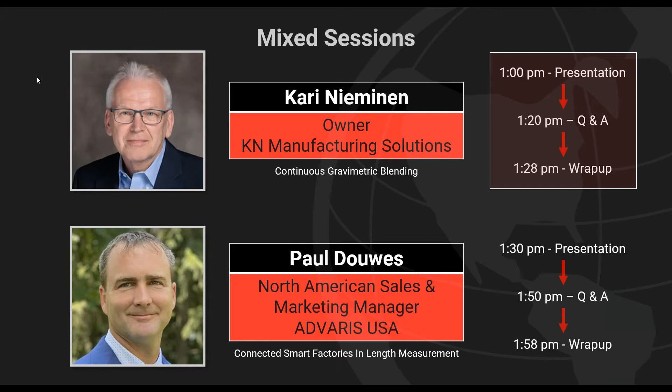Kari: My presentation combines two topics, though it's actually simpler than what we heard. First, we'll discuss continuous gravimetric blending and its benefits compared to other, better-known systems in wire and cable. Second, we'll discuss integration of these systems into lines—not so much how to integrate, but why it makes sense to do so.

A little more background: KN Manufacturing Solutions, my company, serves the US wire and cable market as a distributor for a Dutch company named Movacolor that makes these blending systems. They're pretty well known in the plastics industry, but in wire and cable we still have plenty of work to do. I also do a lot of control work and represent other companies as well, so that's the quick reason for the topic.

Before going further, let's look at the other systems I'll compare to. We have different kinds of blending systems. There's the volumetric blender, where mixing is measured using volumetric measurements or volumetric flow rate, and the same concept applies to gravimetric, except there we use mass measurements or mass flow measurements.

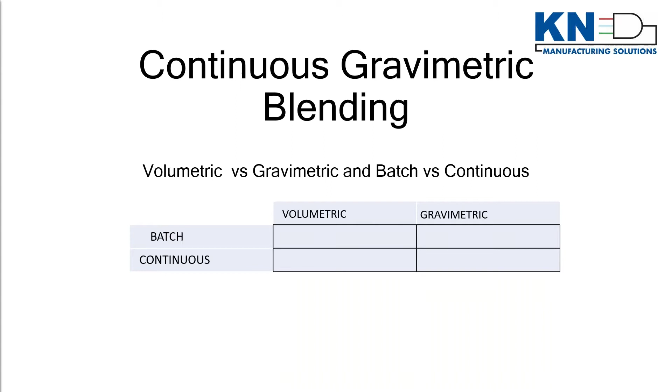From this we get four different systems: volumetric batch blenders, gravimetric batch blenders, continuous volumetric, and continuous gravimetric. The last one is really the topic I wanted to talk about. The other three are quite well known in wire and cable in the US, but the last one definitely is not—that's the reason for this topic.

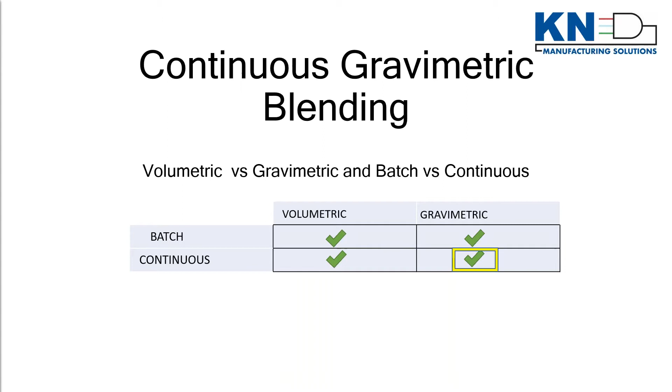On the next few slides, I'll compare two of those systems side by side at a time. I'll start with two batch blenders, showing generally how they work and the main benefits compared to each other—sorry that these sketches aren't great. On the left is a volumetric batch blender, and here we have a gravimetric batch blender shown as a graph. I have a nice picture of this one, but it's just a schematic.

They both have things in common: they sit on the extruders, feeding directly into them, and they have their own local control systems. They also have hoppers for main materials and additives.

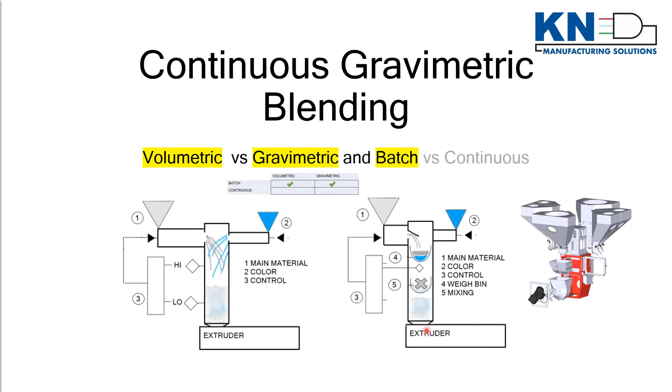That's so special. Okay, just... something's not quite right with the alignment.

Anyway, just a quick comparison. On a batch blender, I guess we can say it's better suited for more accurate handling of material variations because they have a load cell. However, they also have mixing, which sometimes under certain conditions with certain materials can actually make the accuracy worse. So instead of helping, if the mixing isn't good, it can spoil it.

However, on volumetric batch blenders, we can see that they are more user friendly, easier, they need less cleaning, and therefore they're faster for color changes and that kind of thing. However, they will produce some overage waste unless you make a special arrangement.

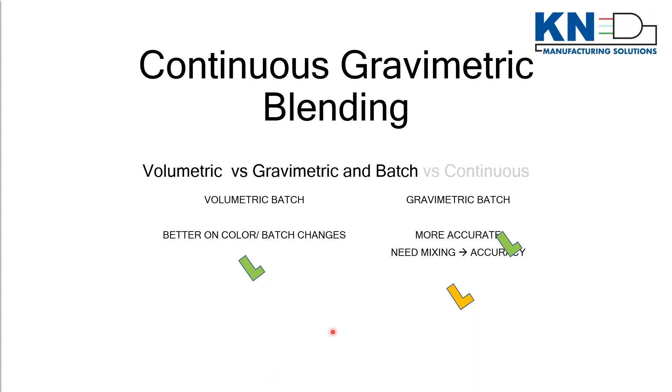Now here we have two continuous systems. On the left, we have continuous volumetry. On the right, we have continuous gravimetry. As you can see, there's not much difference, and that's really the case. Hardware-wise, they look very similar.

Again, they have material coming from the top, feeding through the neck piece to the extruder, and then all the additives come in. There can be a number of additives for different materials, and they come in from the side. Actually, I have a better picture of it. Again, the main material comes through, and the additives are fed in from the side.

Here on the picture, we have a dosing cylinder. Sometimes they're screw feeders, but dosing cylinders provide better output. You can get lower rates with these two units.

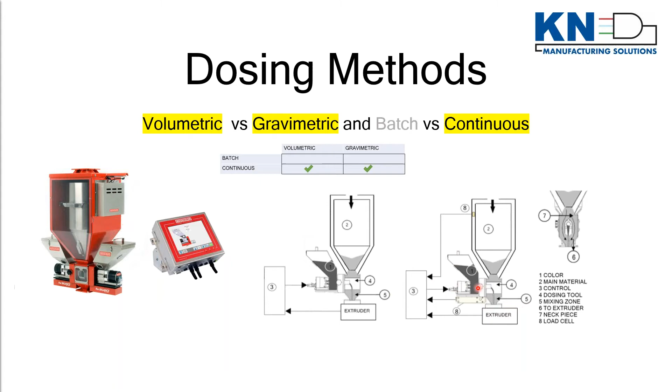But if you look very carefully, you can see the difference. The gravimetric system, of course, must have load cells, and we have a load cell for the main material, and each unit here has its own load cell to measure the loss in weight, from which we can calculate the total output of the extruder and control the dosing unit to maintain the right mixture.

If we compare these two, the only real difference we could see was the measurement. One is gravimetric, with continuous measurement for the material mixture, so it's a much more accurate system than volumetry. Normally the cost difference for this kind of system is quite minimal compared to the benefits we can have.

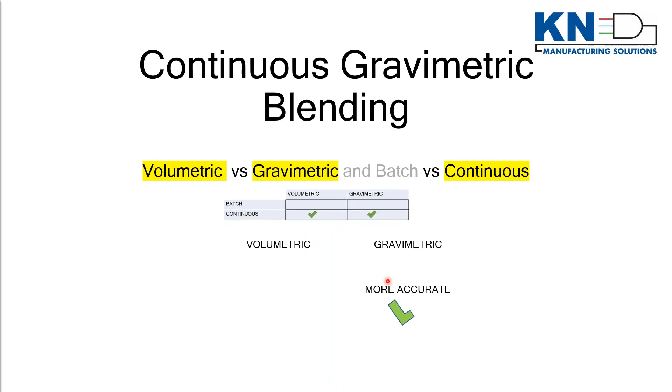One more, last one. Let's look again at the two gravimetric systems. This is the same as what we had a couple of slides ago, and one we had on the last slide.

Just to repeat, on the gravimetric batch system, we measure one material at a time, and for any errors in the measurement or control, normally the correction is done on the follow-up cycles. In the continuous system, all the materials are measured all the time, continuously, and any error is corrected as soon as it's detected.

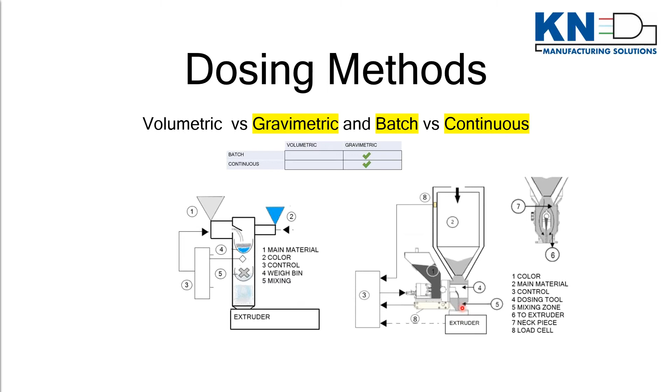On a batch blender, we have to have a mixer, the material has to be mixed. There is no mixer here, no need for one. Material is fed directly through right here, so it's always homogeneous. That's never an issue.

And finally, the design itself. In the continuous system, we don't have this kind of thing because there's no mix or blend stored anywhere. So we can do very quick batch changes. When the batch finishes, we don't have any overage to clean, unlike batch blenders where materials can be in different locations, resulting in either a blend issue or bleed off.

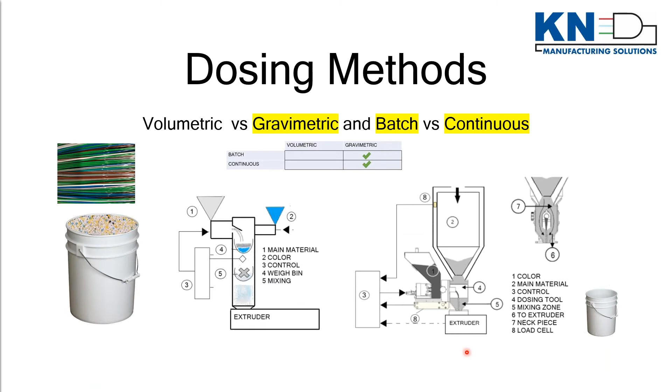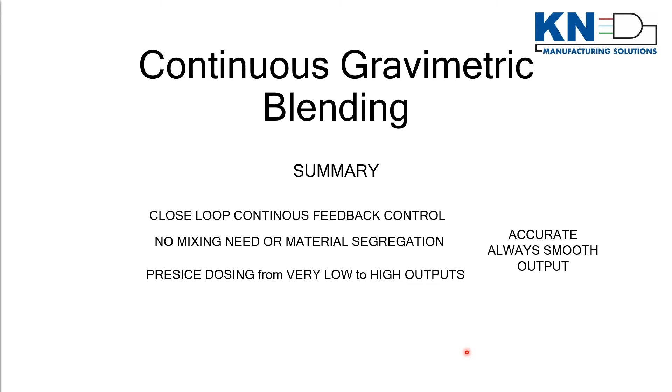So let's quickly summarize to finish the blending part. For a closed loop control system, we have continuous feedback control, no mixing, no material segregation, and we can do very low and high outputs very precisely. Normally the result is very accurate and smooth output on continuous gravimetric systems. There's no blending overage, and we can do color changes and additive changes very quickly, resulting in savings.

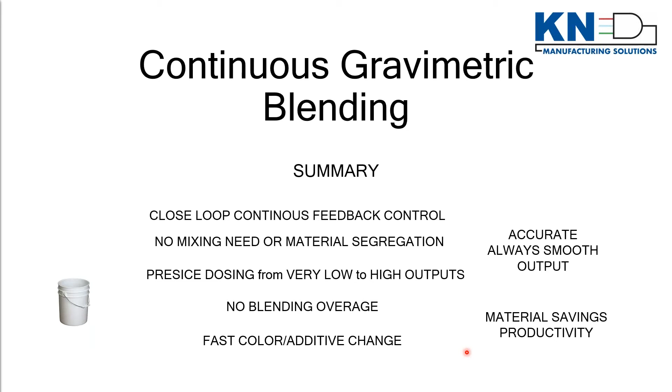Okay, that was how to compare - that was the first part. Now going back to integration, let's start with that part quickly.

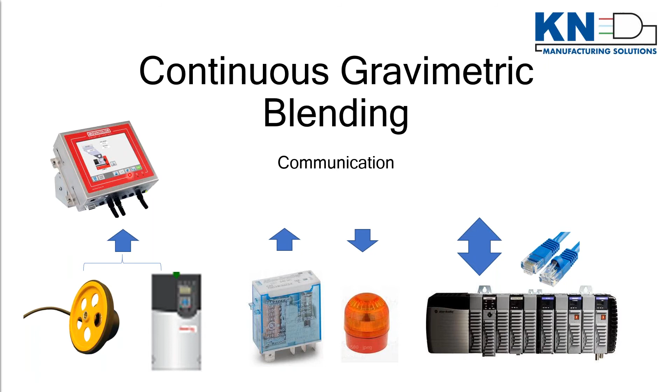Before I do that, just to show you how this unit can be communicated with - there are always some kind of systems, analog, digital, this and that. But when I talk about integration, I basically mean field bus integration, Ethernet or something, which basically allows the system to discuss with the system, to read and write all the information necessary.

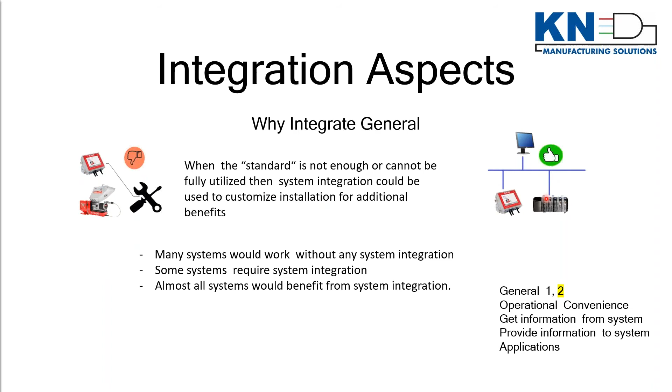And why integrate? As a general term, these systems come in packages with a lot of different features. They have standard features that must be there, that make the machines something everybody likes. But they also have add-on features that may not be suitable for everybody, or people want them done differently. So instead of trying to tweak these systems, we can improve the situation by changing the situation around. So we integrate and make an adaptation of these systems to the outside world.

Then I'll go through some very practical reasons why. The first one is very obvious - we like to have operational convenience. These systems are very often in a difficult location, and those operation panels are hard to reach. Having everything in one console panel where the operator is operating everything else makes so much sense. To do that, you really have to do full integration - you have all displays, alarms, etc.

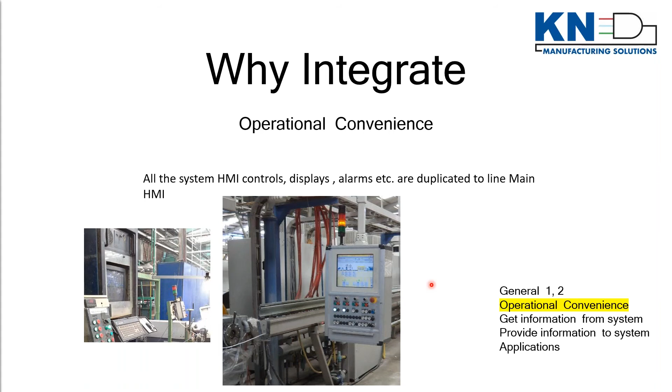There's a lot of information on this system that we can utilize - a lot of process information. We can get material output information, etc. that is needed, and with the integration we can get that. We can log it, we can have it side by side with any other process data in these lines. Normally it doesn't make sense to keep them somewhere separate - if you integrate it, then it's very easy.

Also, we can get the consumption. These systems often provide information about material consumption, but they don't necessarily know what is scrap and what is good product. So once you do the integration, in your control system you can make these differences and define how they are. You can organize and use your own reporting system, whatever you may already have on the platform.

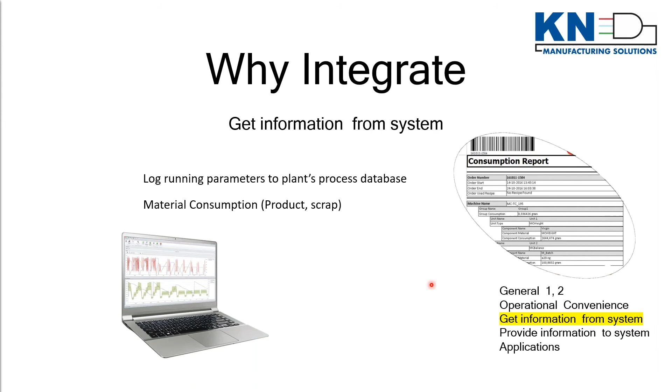Then there's writing information to the systems. Normally, although these systems work very well and they detect changes, when you have fast changes in a process, you can pass that information to the system as a feed forward to make them respond faster. You can also manipulate how these things behave in certain conditions - for instance, you can have them tied to recipe systems, etc.

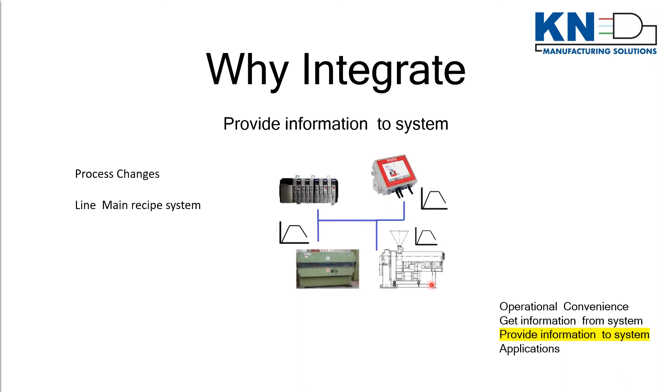Then I'll go through some applications. These aren't new - both applications I'm showing here are nothing new. They've been used in wire and cable, but I want to bring it up just to show how they can be done, since they're normally thought to be kind of difficult applications, but they are not.

All kinds of dimensional measurements and control are typically done this way - you've seen mass per length measurement, kilogram per meter. You've seen this normally done in long jacketing lines where the diameter measurements are far away and the lines are ramping, so the distance to the measurement has been too long. Those systems don't need a blender, but now when you have a blender, that capability is there.

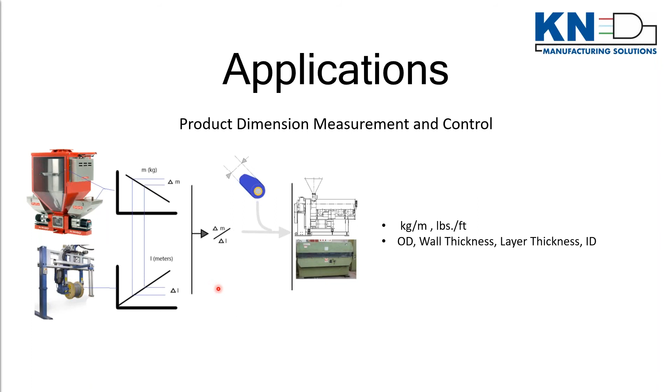Once we generate that kind of measurement, it allows us to have a dimensional change from mass per length unit - these are all in the line control PLCs, line controls. They have this information; once this is integrated, length is always there, and all the dimensional information is there, or set there. So we can get any of OD, wall thickness, layer thickness, ID, depending on the application - they can be measured and also controlled. The idea is there's a lot of capability there, and once you do the integration and have that tied together, everything is relatively easy. The information is in one place.

Another one often mentioned was on one slide - about quick color changes. Anticipating when we are running, we can anticipate that we have to change the color at a certain point beforehand, and it can be done.

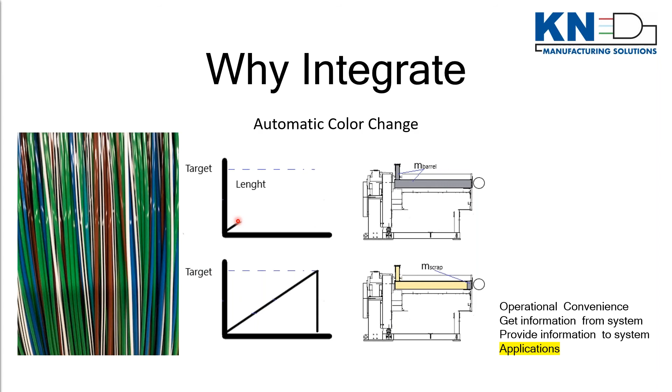So that was my presentation. I hope you found blending interesting, and that you found it's been perfect for many applications. And that's it. Thank you - I don't know how much time I spent.

Well, thank you, Kari. There was a lot of good information there, and we do have a few questions. You indicated in your presentation that continuous gravimetric dosing is more accurate than other forms. Can you tell how accurate that is?

It kind of depends - there are factors, but in general the system gets more accurate the longer you run. What I know is that 1% from the set point is commonly used. So for instance, if your dosing set point is 3%, then it's 0.03% of the 3.

What is the difference between using dosing cylinders and screw augers on dosing feeders? I think it's a preference - at least the company I represent prefers dosing cylinders. They produce a smoother and wider output range. You can get a lower output and still produce very smooth dosing, with a smooth output at a low rate while still being able to go to high output. With screw augers you have to make a compromise.